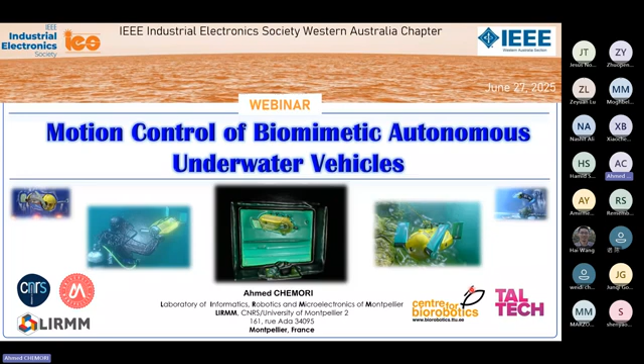This work has been done in a joint cooperation between our university, our research lab, and Taltech University, exactly at the Center for Biorobotics in Taltech University in Estonia.

First of all, before starting the heart of today's topic, let me introduce our research lab. It's situated in Montpellier. As you can see here, you have the map of France, and Montpellier is situated in the south of France. Beyond the fact that Montpellier is a very nice city, we have a lot of beaches.

Montpellier is known for several things. Let me introduce two or three things regarding Montpellier. First of all, we have very nice weather almost all year, and according to statistics, we have at least 300 sunny days per year. The second thing is that we have the Faculty of Medicine situated in Montpellier, which is the oldest faculty of medicine in Europe and maybe in the world. It was founded around 1220.

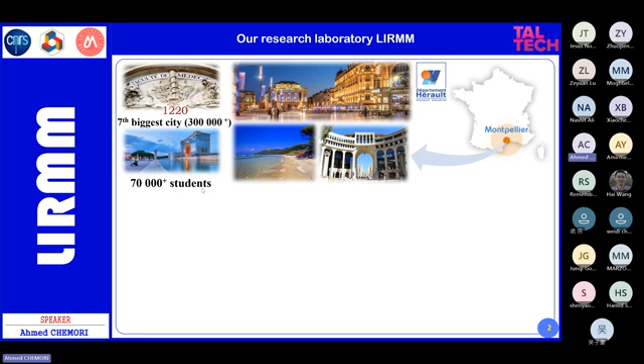Montpellier is the seventh city of France, with a population of more than 300,000 people, and a big part of this population are students. We have two big universities, and the number of students in the city is more than 70,000.

Now concerning our research lab, it's called LIRMM, coming from Laboratory of Informatics, Robotics, and Microelectronics of Montpellier, situated in the north of the city. As you can see on the left picture, we have the old building of LIRMM, and just near this one we constructed another building, shown on the right part of the slide — this is the new building of LIRMM, so we have two buildings.

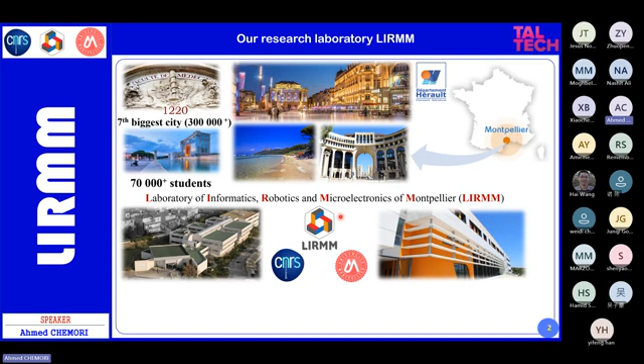Also, we belong to two institutions, as any research lab in the world. LIRMM belongs to the University of Montpellier, but also to another institution called CNRS, which is like a National Scientific Research Council, and it's the biggest research institution in France and in Europe.

In our lab we are more than 440 people, including permanent staff like CNRS researchers and faculty members from the University of Montpellier. We have more than 170 PhD students and 60 people working in administration.

As the name indicates, the lab is organized in three departments. The first one is computer science, which is the biggest department of the lab, almost half of the lab. We also have the department of robotics and the department of microelectronics. Concerning me, I'm working in the department of robotics.

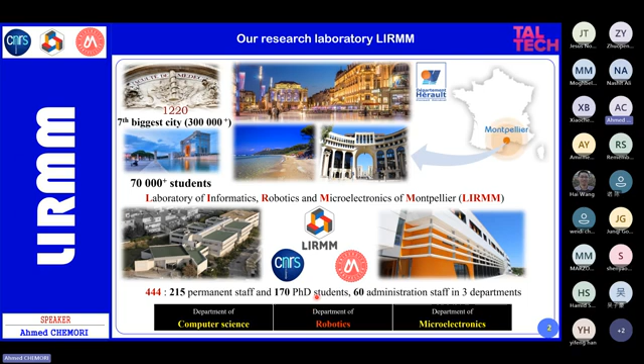Now, before starting the heart of today's topic, let me give you an overview of my research activities. What I'm doing is summarized here in the middle of this slide. I am interested in control of complex robotic systems, and what you see around here are the main applications I'm interested in.

So the first topic, I'm interested in control of parallel robots, or they are also called PKMs, coming from parallel kinematic manipulators. What is a parallel kinematic manipulator? It's something like that, or like that, or like that. So these kind of robots are constructed based on closed kinematic chains. Here in the down part we have the fixed base, and here we have the end effector or the moving platform of the robot. And then we have kinematic chains linking the fixed platform to the moving platform.

And here on the left, you can see another example of parallel robots. These are called Delta-like parallel robots or lightweight parallel robots, and mainly they are used for high-speed motions like food packaging, for instance. And the right picture here represents a parallel robot with 6 legs, and these kind of robots are mainly used for flight simulators or motion simulators in general.

One of the main drawbacks of parallel robots is the workspace. Since you have closed kinematic chains, the moving platform will have a small workspace. To avoid this problem, we can create parallel robots based on an actuation using cables, because the first two examples here show parallel robots using rigid links. We will replace the rigid links by cables, and we will control the cables to move the platform situated here in the middle, so we can have a big workspace. These are called cable-driven parallel robots.

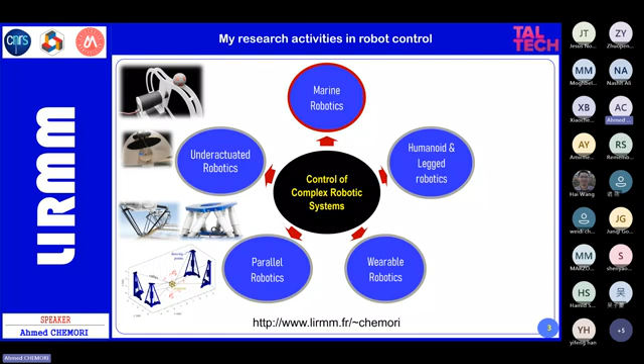Now we have some robotic systems that have less actuators than degrees of freedom, and the control problem becomes very challenging because these systems have internal dynamics which are unstable, and this creates non-minimum phase nonlinear systems, which are very challenging to control. Here you have two examples of under-actuated robotic systems, the inertia wheel inverted pendulum and the butterfly robot.

The third application, and this is the topic of today, concerns marine robots in general, so surface vehicles and underwater vehicles. I'm interested mainly in control of classical propeller-actuated underwater vehicles like this one, and also in the class of bio-inspired underwater vehicles. Especially, we did a lot of applications where we control the vehicle to do a cooperation between the underwater vehicle and the diver. And this is the topic of the lecture of today.

The fourth application: a few years ago I worked on control of humanoid robots, and the idea is to reproduce human walking on a humanoid robot while managing the interaction between the robot and the ground, the kind of ground, the rough terrains, and so on. And recently I have started working on this kind of robots, quadrupeds working in extreme conditions, like for instance the task of making this kind of robot walk in a muddy environment.

And the last topic concerns control of wearable robots or exoskeletons. In terms of control, we have a lot of challenges: we have to manage the interaction between the exoskeleton and the human. We have to manage the fact that the exoskeleton will be worn by a human that we don't know. We don't know, as you can see, the mass of the leg, the inertia of the leg, the friction. We have a lot of parameters and operating conditions that may change, and we have to take this into account in the control design. So whatever the control system we are interested in, for all those systems we have a lot of challenges.

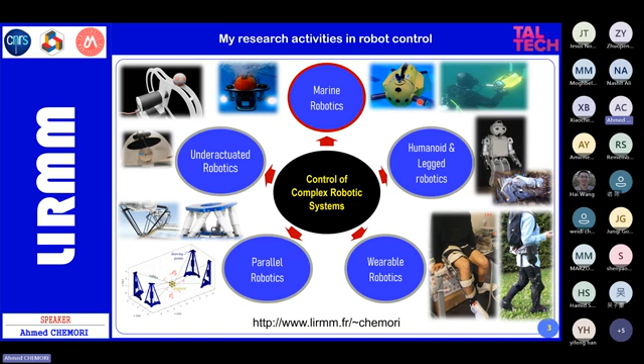This is why I am interested in control of this kind of systems. And also we try to find advanced controllers to control this kind of systems. So starting from now, I focus on the topic of control of underwater vehicles, and specifically the case of bio-inspired underwater vehicles. And here is the outline of the rest of my presentation.

So we will start with an introduction where I will introduce just very basic definitions of bio-inspired robotics, and then bio-inspired underwater robotics. Then I will introduce our underwater vehicle. Our vehicle is called UCAT. So I will explain from where UCAT has been designed, for which reason, which application, how UCAT is designed, the control system, the control inputs, the outputs, and the sensors and actuators, and for which kind of applications we developed UCAT. Then the last part concerns the proposed control solutions. Here I will focus on 5 of them.

The first control scheme is called priority-based control. Before presenting this control scheme, I will explain why this priority-based control. What is the motivation behind developing this kind of controller? Then we will move to the second control scheme that we developed. It's called acoustic-based control, and here we will use a feedback coming from the hydrophones on UCAT to follow an acoustic system, a pinger, in real time, and we will explain how the controller was designed and how it works. The third control scheme, in this case, we used another sensor, which is the camera, and we designed a vision-based control. Also, I will explain and show you a video of how this control scheme works.

The fourth control scheme concerns data fusion, because actually when we designed acoustic-based control, we noticed that we have some drawbacks and some limitations of this control scheme. Then when we designed the vision-based control, we noticed also some drawbacks of this control scheme, and then we got the idea to combine both of them. This is why we called the proposed control scheme data fusion, where we did a data fusion between acoustic signals and images from the camera together in one control scheme. And then also we designed a deep learning scheme that has been used for a specific reason in the controller that I will explain. And the last control scheme concerns fault tolerant control.

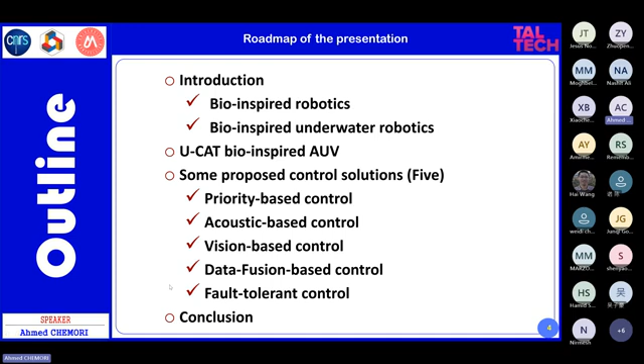I will explain. We supposed here that one of the actuators of the robot is not working, and instead of having 4 control inputs, we'd have 3 control inputs. And what would be the solution? So we propose the control scheme to manage this under actuation coming from one of the actuators not working after a failure. And then I will give a short conclusion of my lecture. So let's get started. First of all, let me introduce, as I told you, basic definitions.

What is bio-inspired robotics? Bio-inspired robotics is very easy to define. It's an interdisciplinary field between robotics and biology. And it includes mainly 2 broad areas. The first area is the area of biomimetics, and the second is biorobotics modeling and analysis. Let me explain further these two areas. So concerning biomimetics, what is the idea? The idea of biomimetics is to draw inspiration from biology. It means that we want to apply biological ideas and phenomena to resolve engineering problems in robotics. So this is the basic definition of the first area in bio-inspired robotics.

And this area covers many technical aspects of bio-inspiration. So we can have bio-inspired design of our robot. We can have bio-inspired motion control. We can have sensors which are bio-inspired, and we can have actuators also bio-inspired. So this is the first area. Now the second area, biorobotic modeling and analysis. The idea here is the application of robotic models and principles to address biological issues. Here it is the inverse. We will apply robotic models and principles to address biological issues.

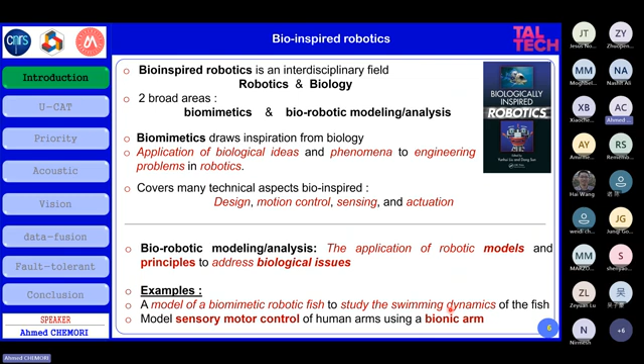Let me give you two examples to understand better. Imagine that you have a model of a biomimetic robotic fish, and we can use this robotic fish to study the swimming dynamics of real fish. So this is biorobotic modeling and analysis. Another example is to model the sensory motor control of the human arm, for instance, using a bionic arm. So the tool here will be the bionic arm, and the idea is to model the sensory motor control of the human arm.

So after presenting these two broad areas, let me now tell you further about biomimetics. So biomimetics can be morphology, but not only. As you can see here, we can design bio-inspired walking robots, inspired from animals. This is an example of a quadruped. We have a lot of examples, like here, a hopping robot. This is the real kangaroo, and this is the bio-inspired kangaroo.

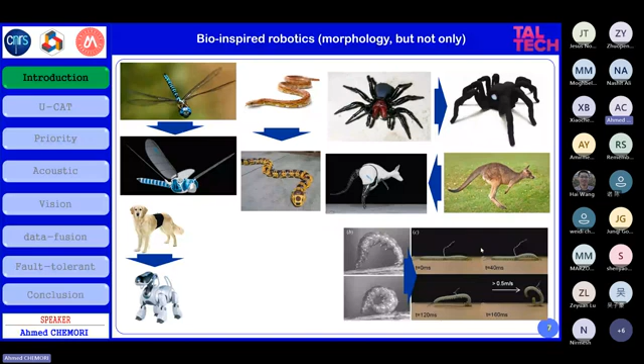As you can see, we have the general morphology, which is bio-inspired, but not only, because actually the actuation system here in the kangaroo is based on the Achilles tendon, which is bio-inspired also. We have some animals without limbs, limbless animals. We have flying robots, as you can see here. This is a dragonfly, which is bio-inspired. We have soft robotics nowadays, which is very much increasing in development, and we can see a lot of examples bio-inspired from insects and animals. And also we can have underwater bio-inspired vehicles.

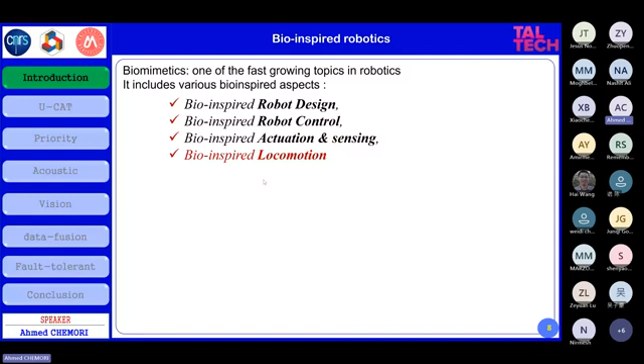Let me now give a definition of biomimetics. So as I told you, biomimetics is one of the fastest growing topics in robotics, and it includes various bio-inspired aspects. So we can design an underwater vehicle, we can design in general any robot, which is bio-inspired from a design point of view. We can also have bio-inspired robot control, so the controller itself can be bio-inspired. We can design robots bio-inspired in terms of actuation, in terms of sensing, or the last example here, the locomotion.

As you may know, for locomotion, we can have this very simple classification of bio-inspired locomotion. So in locomotion in general, we have terrestrial, we have aerial, and we have underwater. Let me introduce the three of them. First of all, for terrestrial locomotion, the human created the wheel. As you can see here, some examples of wheels. So we can use the wheel to move on the ground. However, if we are interested in bio-inspired locomotion, we will forget about the wheel and replace it by something else.

We can replace the wheel by legs, like animals here, and we have legged robots. As you can see here, we have an example of a quadruped, a robot with 4 legs inspired from animal quadrupeds. We can have also terrestrial locomotion based on limbless design. Here there are no limbs, and by undulation of the body of the snake here, or the snake robot here, you can have this locomotion.

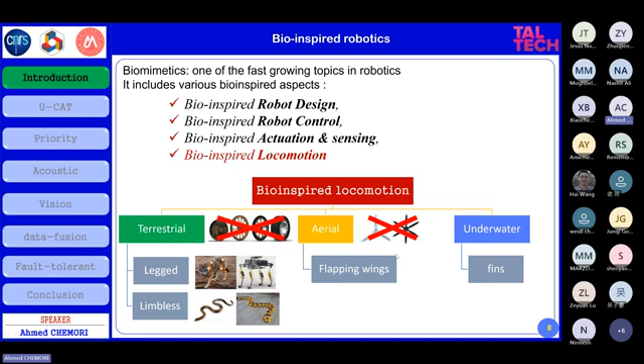Let me now introduce the aerial case. For aerial locomotion, the human also created propellers, as you can see here in two examples. And when we are interested in bio-inspired aerial locomotion, we will forget these classical propellers, and instead we will use flapping wings. Here you can see an example of a robot which is bio-inspired, equipped with two wings. And the idea is to control the motion of these two wings to control the motion of the body in the air to do a specific task.

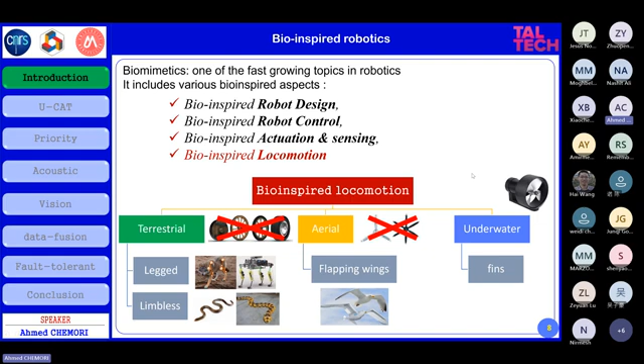The last example that I may show here is, for the case of today, underwater. For underwater, as I told you, humans created propellers. It's slightly different from the aerial propellers in the fact that you have here an envelope around the propeller, such that you will have a better efficiency of this propeller and a better generated thrust or force used to control the vehicle. And then depending on the underwater vehicle, we may have vehicles with one propeller, two propellers, six propellers, eight propellers, depending on the design of the vehicle itself.

So if we are interested in bio-inspired underwater locomotion, in this case, we will not use this kind of propellers, and instead we will focus on using something else. If we see the sea animals, they are using fins. So for bio-inspired underwater locomotion, we'll use fins, and we will have two kinds of fins that I will detail later in the lecture. And here you have some examples of bio-inspired underwater robots.

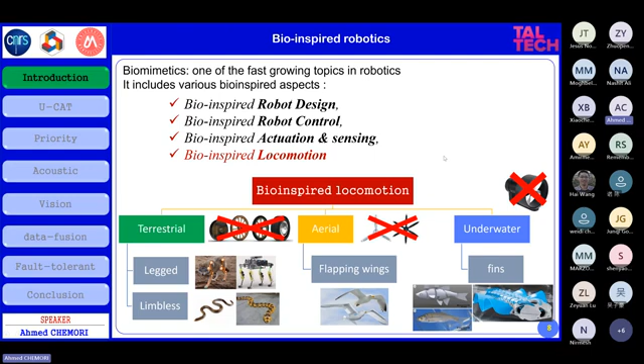And this umbilical is used for another reason also. The underwater vehicle is equipped with several sensors, and to get the measurement from the sensors on board the vehicle, we use this cable also, or this umbilical. So this is the first class, and the challenges in terms of control of these underwater vehicles: actually they are controlled in open loop, because it's the human controlling the underwater vehicle, and he can see on the screen the feedback from the camera and the measurement from the sensors.

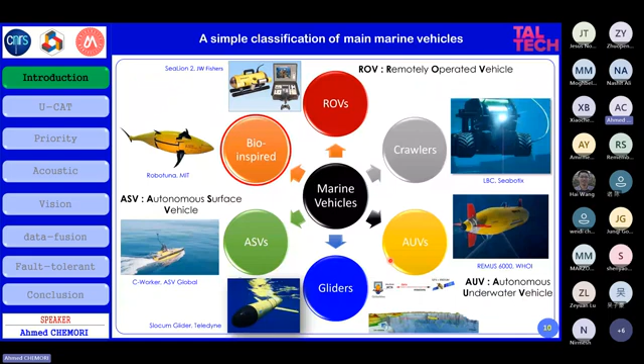However, if we look to nature, let me introduce you 4 examples. The first one is the sea turtle. The second one is the sea snakes. The third example is the manta ray. And the last one, flying fish. So if you look to the sea animals, none of the sea animals are using propellers.

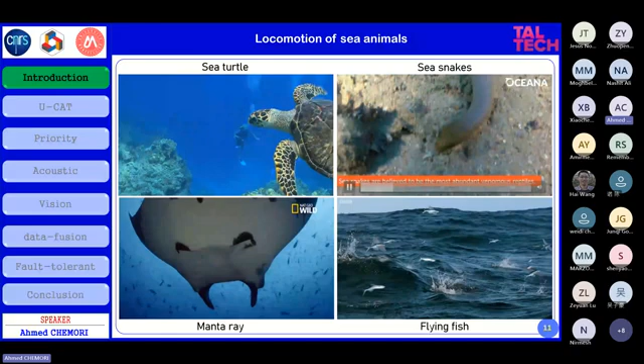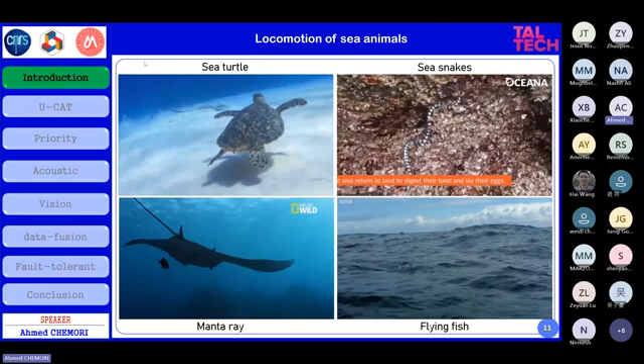Snake robots, by undulation of the body, can have a very smooth motion. They can go inside confined environments. Here also the third example concerning the manta ray. Here the actuation is slightly different from the turtle because it's not using oscillating fins, but it's using undulating fins. And the last example, the flying fish, uses the fins both for underwater and also for flying. And now the idea is, why don't we design robots inspired from these sea animals?

So let me introduce now a basic definition of bio-inspired underwater vehicles. A bio-inspired underwater robot is a robot designed based on biological ideas. As I told you previously, it can be based on the design itself, the actuation system, the sensing system, and so on. And it is designed to address technological problems in robotics. So what are the main features of a bio-inspired underwater vehicle?

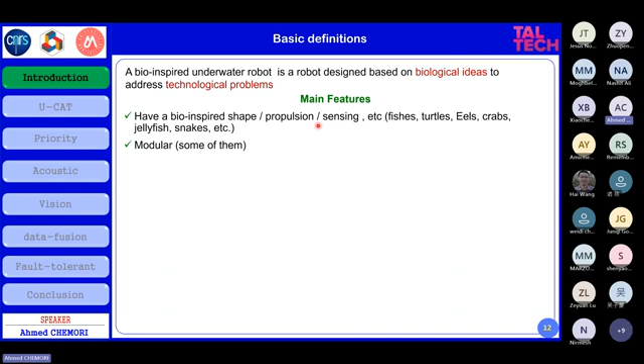First of all, bio-inspired underwater vehicles may have a bio-inspired shape, as you have seen in some examples. The propulsion system or the actuation system can also be bio-inspired, as well as the sensors, and we can find a lot of examples inspired from sea animals, including fish, turtles, eels, jellyfish, snakes, crabs, and so on.

And some of them, like the snake robots, are designed based on modular conception, because it's easier in this case: you just construct a module and you duplicate this module, you connect all the modules, and then you control them to generate the motion of the underwater vehicle.

Some potential applications where these bio-inspired underwater vehicles are used: for data collection, if we want to measure the quality of water, we can use this kind of vehicle. Underwater pollution detection, for instance in a pipeline, where you want to detect pollution. They may be used also for video footage, inspection, and monitoring, and also to study new sensing and actuation strategies.

It means that you design a new actuation system and you want to study the effect of this actuation system, the performance, compare it with other propulsion or actuation systems, so you can design or use these bio-inspired vehicles.

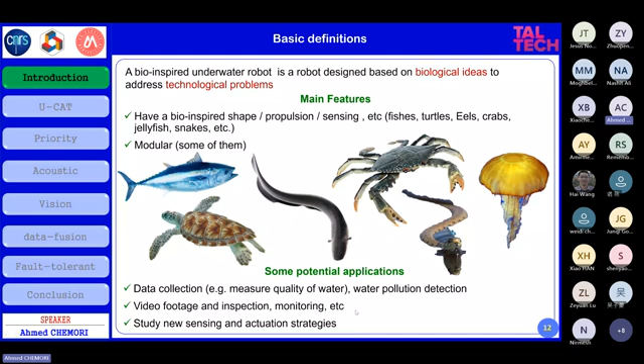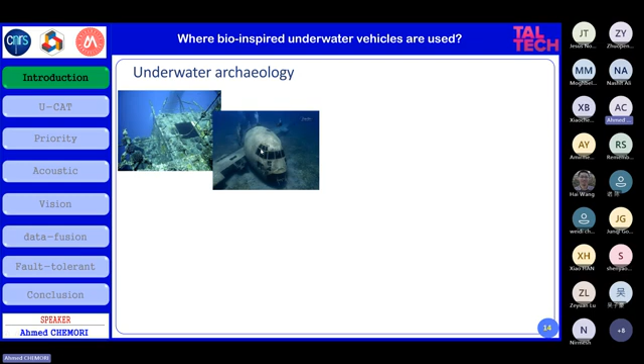Underwater archaeology means you have to go inside a shipwreck or airplane wreck, as you can see, inside water. It's very challenging to do this task because of a lot of challenges that I will explain later on, because actually in our vehicle U-CAT, we are interested in this specific application.

A second application can be cooperation between the bio-inspired underwater vehicle and a diver. It can be cooperation or just simple following, so the diver is moving and the underwater vehicle should follow the diver in real time. This is the second application.

The third application is for fish monitoring and aquaculture applications. For instance, you have a population of fish, and you can have a lot of problems. One simple question we may ask is how we can know the number of fish inside a specific area, how we can count them. Counting the number of fish is a problem, and as a solution, a bio-inspired underwater vehicle can be used to study the motion of the fish with less disturbance. Maybe we can design a fish-like underwater vehicle for this.

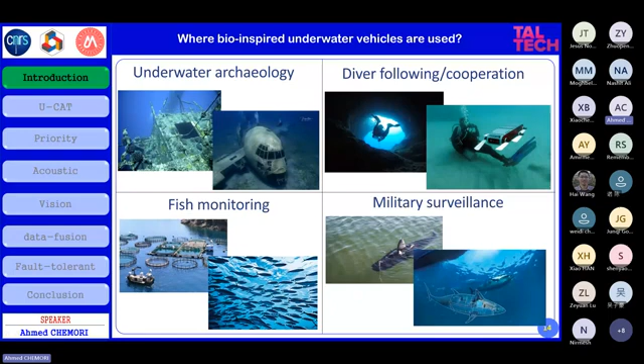The last application is for military tasks, like military underwater surveillance, for instance. We can also use bio-inspired underwater vehicles here. After this introduction of the different applications, let me show you some examples of existing bio-inspired underwater vehicles.

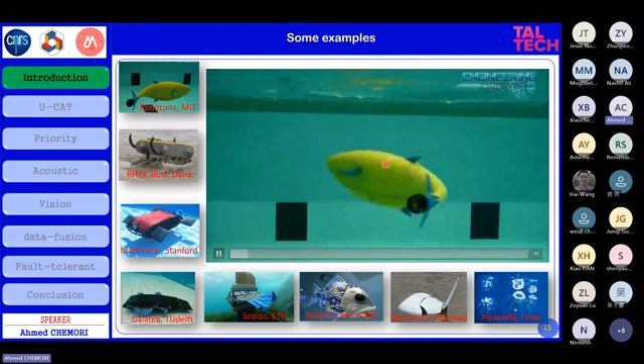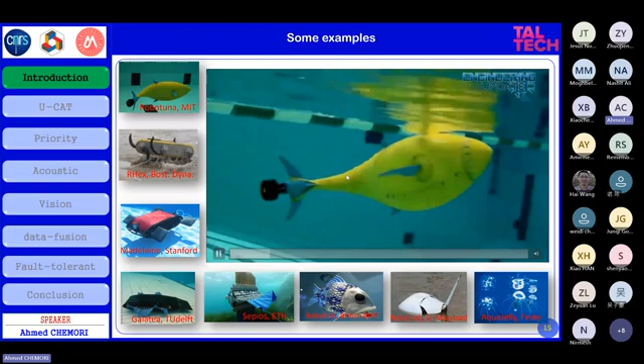As you can see, the first one is called Robotuna. Robotuna has the morphology of a fish, with different fins and so on. You have to notice that the tail is flexible, and the tail is controlled to move to the right and to the left. Also, we can see the propeller at the end of the tail of this fish.

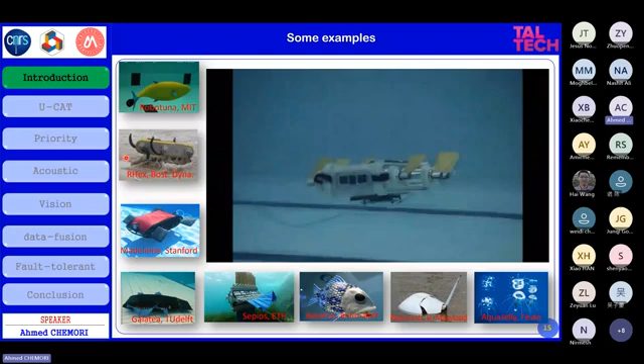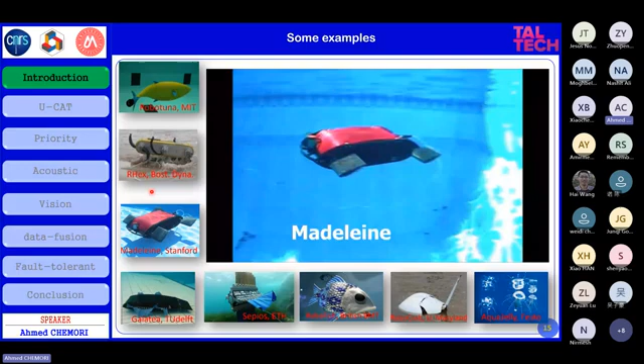The second example, from Boston Dynamics, is called RHex, an underwater vehicle with 6 propellers, though here it's not classical propellers but 6 fins. The next one, Madeleine, is from Stanford University, similar to the previous one, but here it uses 4 rigid fins, and the fins are controlled to control the motion of the underwater vehicle.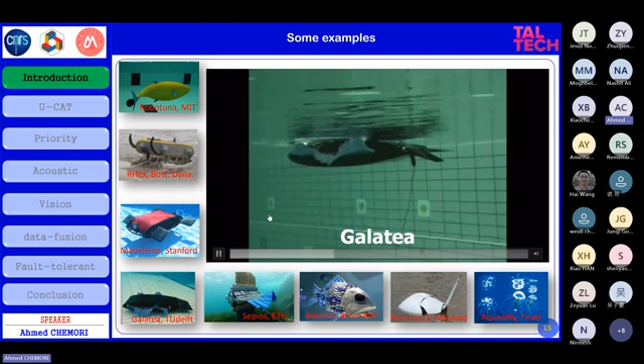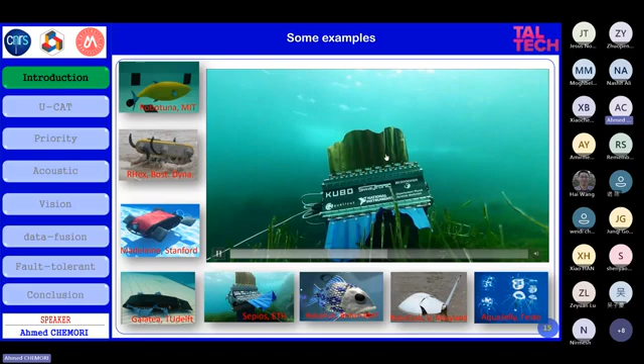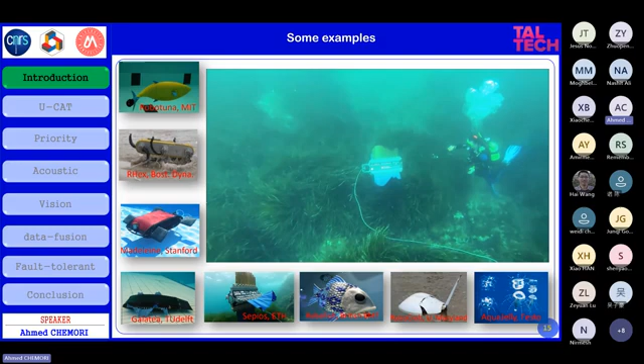The next one is called Galatea, from Technical University of Delft in the Netherlands. This is what I explained before: undulation fins. The fins undulate, and if you want to control the motion of the vehicle, to go faster or slower, you change the parameters of this undulation. Next is Sepios, also from ETH, same concept, using 4 undulating fins. To go faster or slower, you can change the oscillation parameters of these fins, like frequency or amplitude. These two parameters can be used to control the motion of the vehicle.

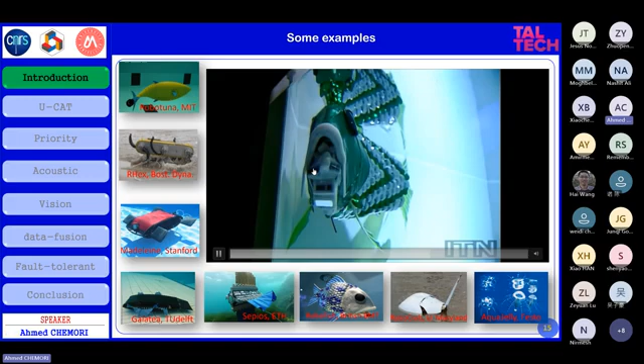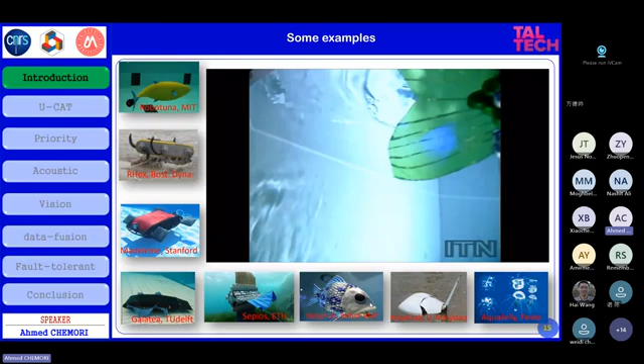The next one, Robofish, as you can see, is like Robotuna. It has the morphology of the fish. It has a tail, which is flexible and can move. It's controlled to move to the right and left to push the vehicle in the desired direction. Depending on the application, you may put a camera here, for instance, to take pictures or videos.

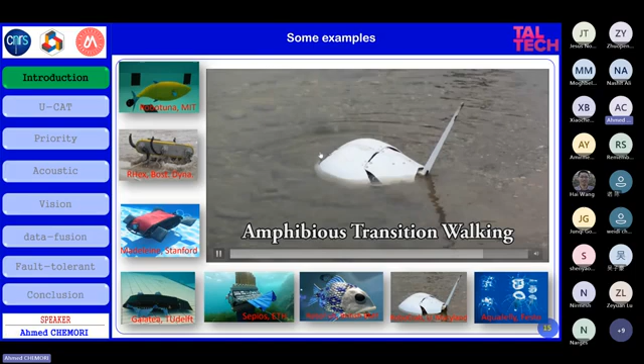The next one is RoboCrab, an amphibious underwater vehicle, because as you can see, it is able to walk on the ground and also able to swim or dive inside water. This is why it is amphibious. In terms of control, in both mediums, it's not the same technique that we may use.

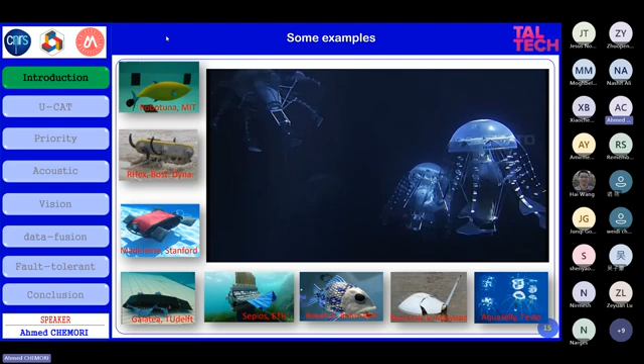Here's the last example, AquaJelly from Festo. This is a bio-inspired underwater jellyfish, and as you can see, its actuation system is very simple: an actuator that moves up and down, moving the different fins of the vehicle to move inside water. Now let me move to our underwater vehicle.

Our underwater vehicle, as I told you, is called U-CAT, designed a few years ago at the Center for Biorobotics in Estonia at Tallinn University of Technology within a European research project called ARROWS. The idea behind designing UCAT was mainly for archaeological applications: to go inside a shipwreck and take pictures, videos, and do inspection of the shipwreck. This is the main application of UCAT.

So what does this mean? What are the consequences if you are interested in shipwreck inspection, and what constraints must be taken into account in the design and control of this underwater vehicle and its actuation system, because of this specific application? I will say a few more details about this.

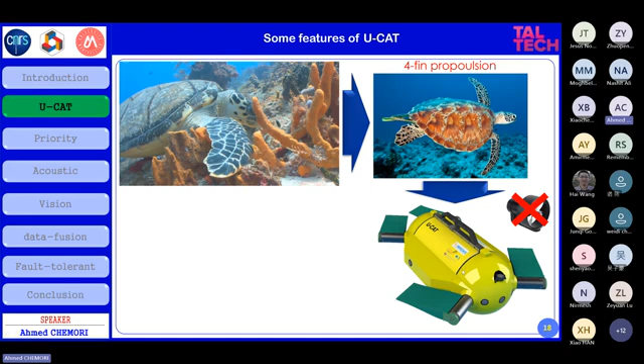Some technical features of this underwater vehicle: first, why we designed it and why we were interested in controlling it. Mainly the targeted application was underwater archaeology, specifically inspection. So the robot is not equipped to do underwater manipulation, just underwater inspection, mainly using a camera or video to identify objects of interest.

In the design itself, regarding the underwater archaeology application, we had a lot of constraints, and one is the size of the underwater vehicle. It should be small, because we have to go inside the shipwreck, a confined environment, so we have to pay attention to this. If you design a big underwater vehicle, it won't be possible to go inside the confined environment. This is the first reason.

The second one: it should be highly maneuverable, to change direction and orientation very quickly.

This is needed also for this kind of application. Then another constraint regarding the design of the vehicle concerns the actuation system. As you can see here, we don't want to use classical propellers. Why are classical propellers not a good solution for this kind of application? Because they restrict the visibility near the bottom.

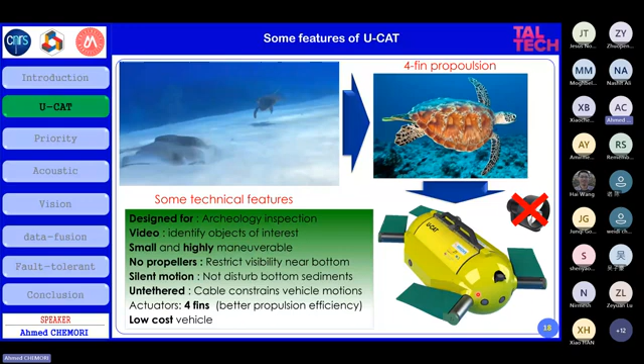In terms of actuation, as I told you, we have 4 fins, the green parts here, actuated by motors, and I will give you more details about this in the next slides. Now let me introduce the actuation and sensing of this underwater vehicle.

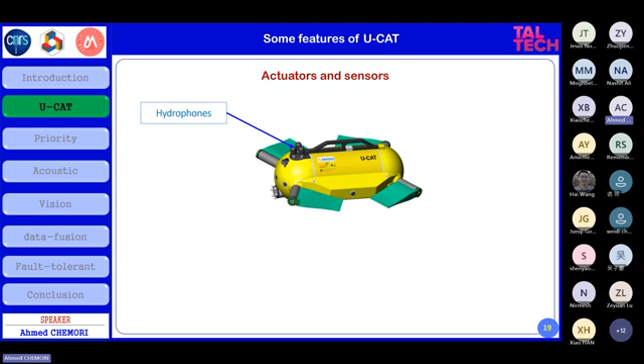In terms of sensing, the robot is equipped with 3 hydrophones. Why hydrophones? They are used for underwater acoustic communication. For instance, I will show you some scenarios where we did acoustic-based control, using these 3 hydrophones to control the underwater vehicle. I will give you more details in the next slides.

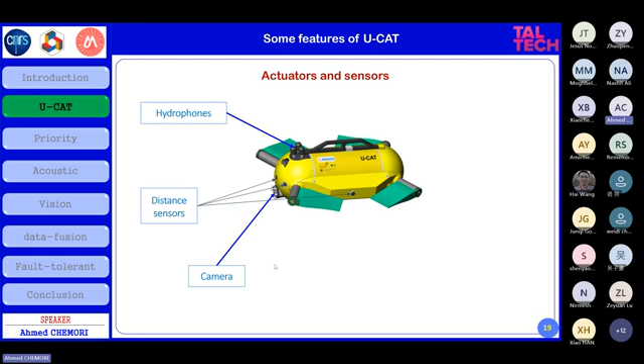Then the vehicle is equipped with some distance sensors. It has a camera to take videos and pictures of objects of interest, and also different kinds of sensors, like the IMU, the inertial measurement unit, used to measure the orientation of the vehicle: roll, pitch, and yaw.

It's also equipped with other sensors, for the depth, which is a state we need to control and measure in real time. We use a pressure sensor to measure in real time the position of the vehicle underwater, and other sensors like temperature or humidity sensors.

In terms of actuation, we have 4 DC brushless motors used to actuate the 4 fins of the underwater vehicle. We also have inside the vehicle a buoyancy control system, which we can change to move up to the surface or down, based on this buoyancy control. In the actual controllers we proposed, we didn't use it yet, but the initial design of UCAT includes this buoyancy control system.

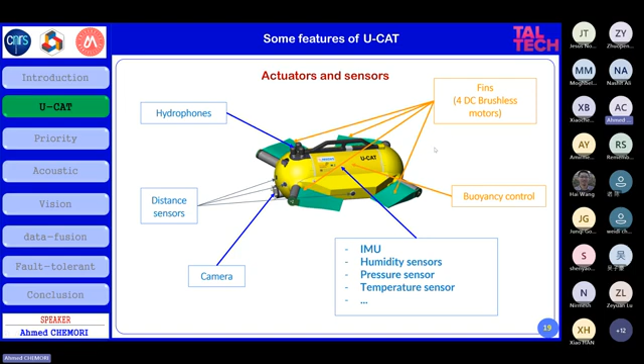Now, what we have proposed as control solutions. Let me show you first some control issues. The first control issue, as I explained before, is the actuation of the system itself. We want to control some organs or control system in the vehicle, so we had the choice between using classical propellers or using fins like that.

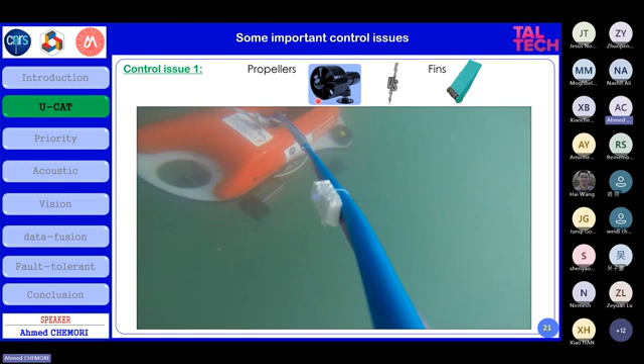Let me show you our design, why we chose fins like that instead of classical propellers. The video we will show you compares classical propellers to fins. Here we have another underwater vehicle, an ROV, which uses classical propellers. We did this diving task near the harbor, and see here the sediment disturbance.

So if you use a camera here, we cannot see anything, and this is very bad for underwater inspection based on a camera. This is the reason why we don't use classical propellers like that. Instead, we use fins.

Here in this sequence, as you can see, UCAT is diving very close to the bottom, to the seafloor, and there is no sediment disturbance because of the motion of the fins, which does not disturb the sediments. This is the first thing to keep in mind.

So we are using fins to avoid disturbing sediments, but not only that—we have other reasons too, because of energy consumption. We haven't yet proven that this kind of underwater actuator is better in terms of energy than the propeller, but it's possible to prove this.

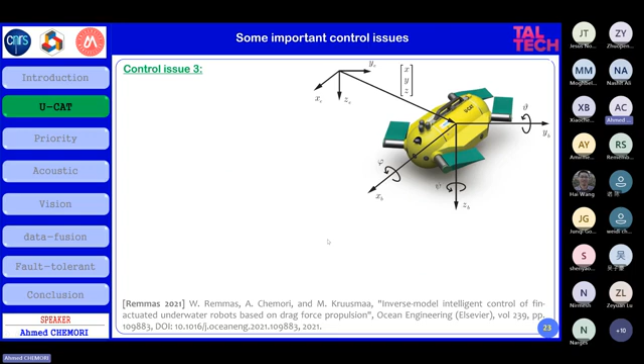The third control problem concerns the fins themselves, because for a classical propeller we can find in the literature a very nice, precise model of these underwater propellers. However, for our case, using fins like that, the model may be very difficult. The model of the vehicle itself is easy; we can find it in a textbook of marine robotics, the model of an underwater body like that of the vehicle. However, the actuation itself using fins, it's very difficult.

Very difficult, why? Because actually the fin itself is not rigid, it's flexible. And if you want to take in this flexibility to have a nice model which is precise, you need to use, for instance, the finite element method. But the consequence is you have a very precise model, but its complexity will be very huge, and it will not be possible to integrate this model in real time for the control of the vehicle.

However, we can use a very simple model also by neglecting a lot of things, neglecting flexibility, for instance. You have a very simple model, but it will not be very performant. So the idea is to take a compromise between high complexity, where you have a very precise model, and very low complexity, where the model is not very precise. So we have to take this compromise. And the dynamic model can be written like that.

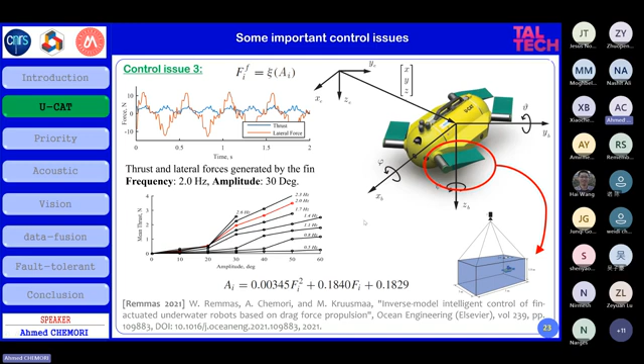So it's a compromise. We make a lot of assumptions, and we arrive at this model that can be integrated in real time. So we used first this model, and then we worked on a more complex model that I will not present here. The fourth control issue here is the control mode, because the vehicle can be operated in

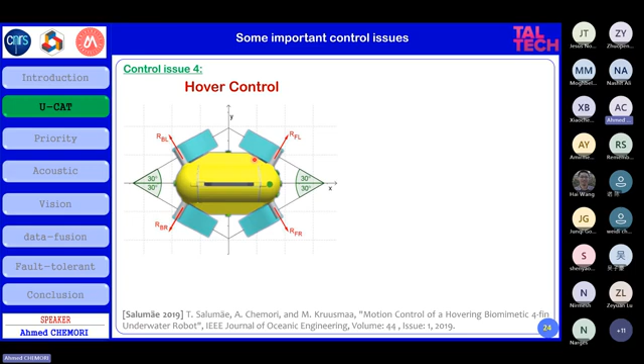two control modes. The first control mode is called the hover mode. In the hover mode, as you can see, the orientation of the fins is like that. This is the front of the vehicle, the rear of the vehicle, and we orient them like that. We have a second control mode, which is called the cruise mode, and the orientation is different. This is the front of the vehicle, the rear of the vehicle, and the fins are oriented like that. What is the difference between the two control modes?

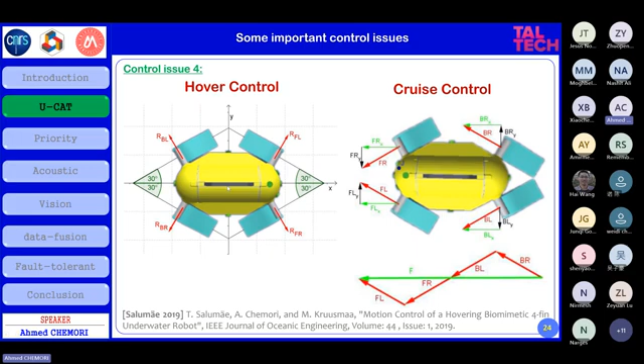The cruise mode is used mainly to move for long distances, like for surge, because the generated force, or thrust, by all the fins, the rear fins and the front fins, is bigger. However, hover mode control is well suited if you want to stay around a specific position, like dam inspection, for instance. You want to stay in front of the dam to take a picture or a video, and you want to stay stable around this position. In this case, the cruise mode is not possible, because it is designed for a continuous motion along the surge. However, with hover mode, we can stay around a specific position with precision.

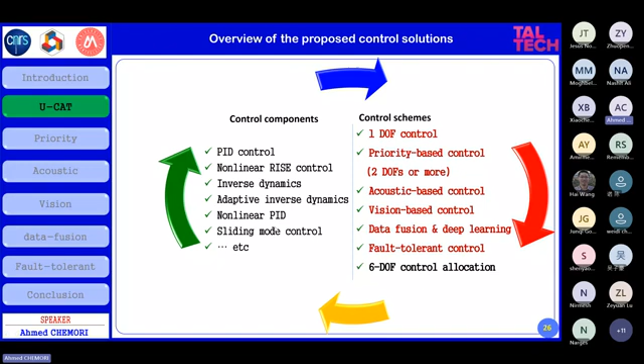Now, in terms of control solutions, we designed several control solutions. We started with the control of 1 degree of freedom. We designed different controllers. As I told you, if you want to control just 1 degree of freedom, it's not very difficult. Then we tried to tackle the problem of controlling more degrees of freedom. So we started with priority-based control that enables controlling 2 degrees of freedom or more. And then we tried to use the sensors on board the vehicle as feedback. So we used acoustic signals, vision-based signals, data fusion between them, and fault-tolerant control at the end.

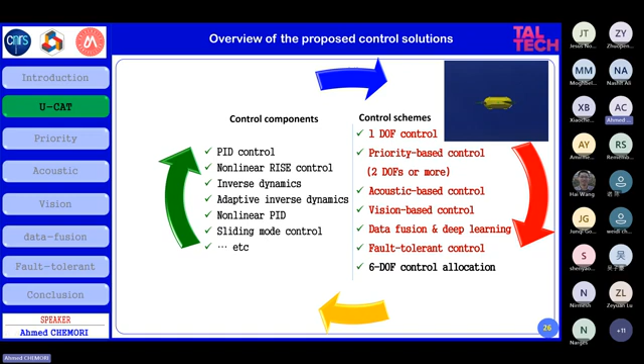We did another work, actually, which is in progress, where we are controlling all 6 degrees of freedom. We did some simulations first to validate the control schemes in a simulator of a robot. Then we did experiments in a controlled environment in the pool, and then we did different experiments in open water. And here, just to show that the robot is human friendly, we organized a day for kids, and they were swimming near the robot without any safety problems.

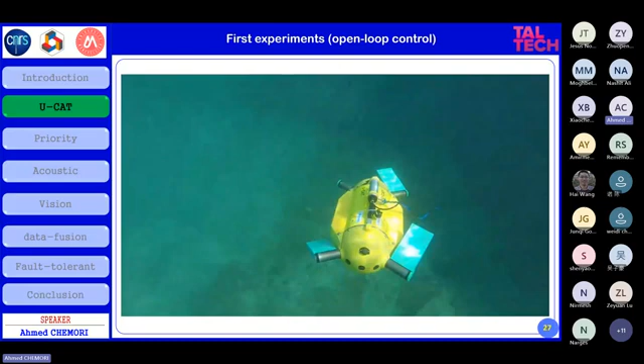Now, let me show you some of the experimental results that we obtained. First of all, this is the control of the vehicle using a joystick. This is an open loop control without any controller inside. It's just the human manipulating the joystick to control the motion of the vehicle. And here you will see an illustration of the different degrees of freedom, the motion, the different orientations, how the vehicle is moving, and especially the consequence of this kind of open loop control.

Look here, this camera is on board the vehicle, and when the vehicle is moving, you can see that the roll is not very stable. The roll is not very stable for a reason. Here is an illustration of the different degrees of freedom; here we are moving along the y-axis.

We change quickly; the orientation is highly maneuverable. Now we are rotating around the z-axis, for instance, by moving the fins of the vehicle, and we have different illustrations. Now, the problem of the roll, why the roll is moving like that, as you can see, is because we have the fins, the right side and the left side fins.

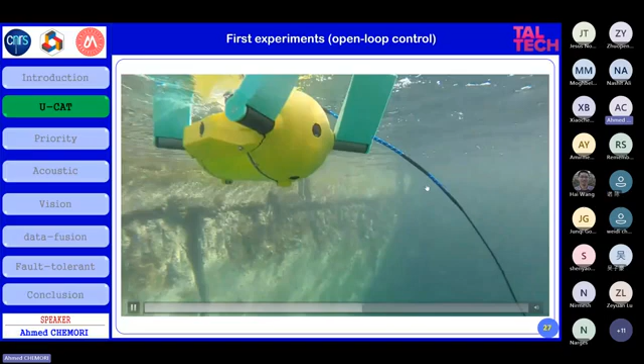Here you can see the human using the joystick, controlling the vehicle, and you can see the obtained motion. And as I told you, the problem of the roll instability is coming from no synchronization between the right and left fins. So without any synchronization, we obtain a roll of the body of the vehicle which is not stable in the roll degree of freedom.

Here you can see that the fins of the vehicle are flexible. As you can see, they are not rigid, and this is the obtained motion. Nice. So after this open loop control, let me show you a closed loop control. We started with the control of 1 degree of freedom. Here is the control of the depth, and we did the experiment in a swimming pool.

And as you can see, the perfect motion of the vehicle vertically up and down, by controlling the fins of the vehicle. And the roll of the vehicle is very stable. The reason behind this is that we did a synchronization between the right and the left fins of the vehicle, so we obtained this stable vertical motion.

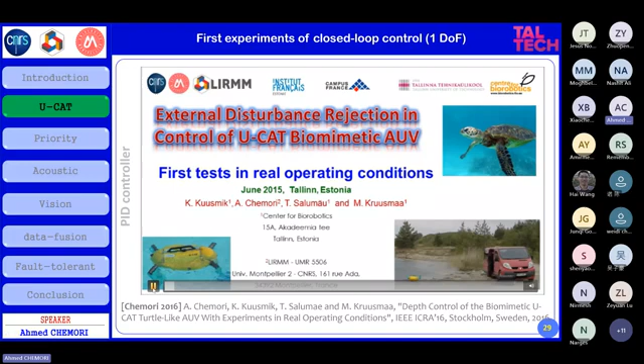So after controlling the vehicle in 1 degree of freedom, we started doing experiments in open water. We did some experiments in Estonia here, and you will see that the operating conditions are much more challenging than the previous case in the swimming pool. As you have seen, the visibility was very good. However, here the visibility is not so good. We have different particles inside the water, and so on.

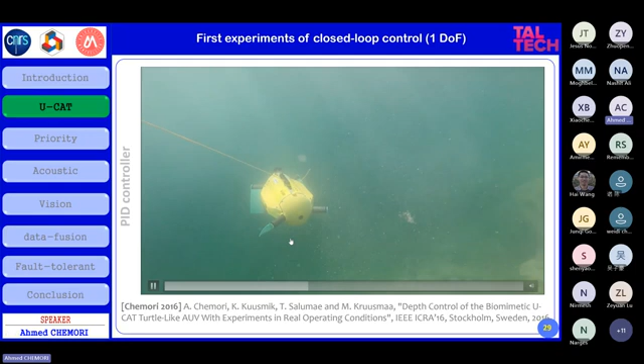So we go from the surface to a certain desired depth. If you want to go down, you orient the fins in this direction and control the oscillation. If you want to go up, you have to orient the fins down like that. When you arrive at the desired depth, which was around 2 meters, the orientation will be horizontal. Horizontal orientation of the fins means that the tracking error on the depth is near zero.

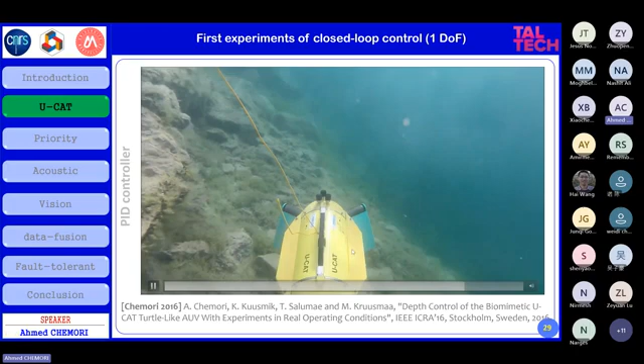Here we disturb the vehicle; we apply an external disturbance. The yellow cable that you see here is not an umbilical, pay attention. It's just a wire without any electronics inside, no control signal, nothing. It's first to disturb the vehicle, and second to avoid losing the vehicle inside the lake where we did the experiments. So we apply this disturbance, it goes back around the desired value, and this shows that the controller is able to reject this external disturbance.

So if it is 0, it means that for the yaw and the depth, the weighting value is near 1, and the weighting function for x, for the surge, is almost 0. It means that we give more priority to the depth and the yaw. If you want to give more priority to the surge x, we have to choose a parameter near 1. And then we can switch between 0 and 1; we can take continuous values between these two values.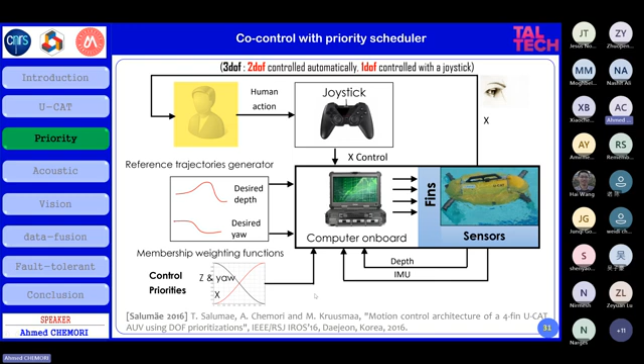The obtained results in trajectory tracking: this is the trajectory that we designed here, as you can see. So we did 3 control modes. The first one is the manual control. So we ask the human to follow this predefined trajectory approximately, and the human is manipulating everything. So here, the robot is manually controlled by the human.

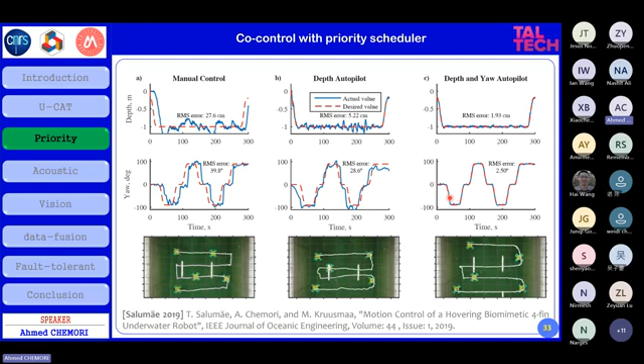Then we try to reduce the intervention of the human. In this case, we add a depth autopilot. It means that the depth is controlled automatically, and the human is controlling just the yaw. And the last one is the depth and yaw autopilot, so both are automatically controlled. And as you can see, the tracking is much better in the third, autonomous case.

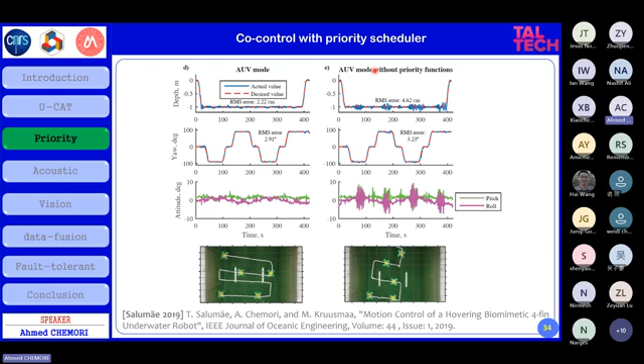And this here shows what happens if we add or don't add these priority functions, and without the priority function, the tracking error is worse than the case where we take them into account.

Then acoustic-based control: the idea is to use the 3 hydrophones of the underwater vehicle to follow a pinger. We did different scenarios, a static pinger, then a moving pinger. We give the acoustic pinger to the diver, who will move, and based on this measurement, we try to follow the diver in real time. Let me show you the obtained results for this scenario.

So here we ask UCAT to follow the diver. The diver is moving here. We use the measurement from this pinger. It's the yellow part here held by the diver. And the diver is moving. And as you can see, UCAT is controlling the depth, the yaw and the surge to follow the diver in real time. So the diver is moving and UCAT is following the diver in real time, as you can see here, thanks to this feedback from this acoustic signal.

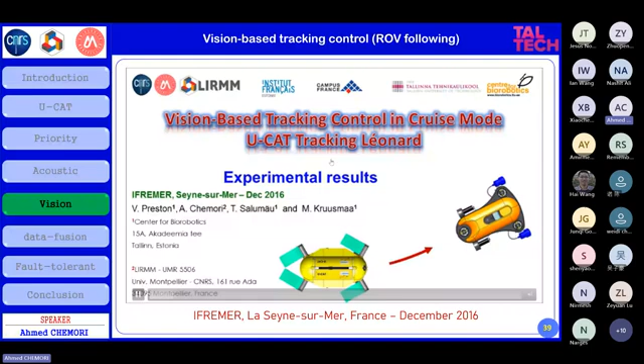However, what we noticed here is the problem of precision of tracking, because we cannot have a good precision of tracking using this acoustic signal. Then we tried another measurement, which is the camera. And based on the camera, we designed a vision-based tracking controller.

Here, the scenario is an underwater vehicle moving, and UCAT is using just the camera to follow this moving underwater vehicle. And the big challenge here is we need to keep the first vehicle, the target, inside the field of view of the camera. If the first vehicle is turning to the right or the left, we may lose it very easily outside of the field of view of the camera, and in this case we cannot do anything.

This is why we need to design a very reactive controller, such that when the target starts moving to the right or the left, we turn to the right or left quickly to avoid losing the target in real time, and we succeeded in this tracking. So the camera has a good performance in terms of precision. However, if the target is outside of the field of view, or far away from the vehicle, or if the visibility is not good, the camera is not suitable.

Then we designed the data fusion controller, and here we tested using both. It means that if we can see the target in the field of view of the camera, we'll use both, the acoustic signal coming from the pinger and the camera. If the target is outside the field of view or far away, or the visibility is not good, we'll rely only on the pinger, the acoustic signal. And then you can switch between them depending on the situation in real time.

Here we tried the following. We try to follow the diver, as you can see, and once the diver is outside the field of view of the camera, we stop the experiments because we cannot continue. We don't have any further information. So this is the visual tracking.

And the last scenario here is fault-tolerant control. So what we did in this work is we suppose that one of the fins is not working. We stop one of the motors and we keep just three working, and we try to follow an elliptical trajectory like that here. We compare the PID controller and the sliding mode controller.

Here, just one information regarding the tags that you can see in the bottom of the pool here. They are used to measure or to localize X and Y. So the surge and the sway, the position in X and Y of the robot. This is why we use these tags here and the camera of the vehicle, so we can know the position XY of the vehicle. The depth and the three angles are measured by using the pressure sensor and also the IMU. And here we do the tracking.

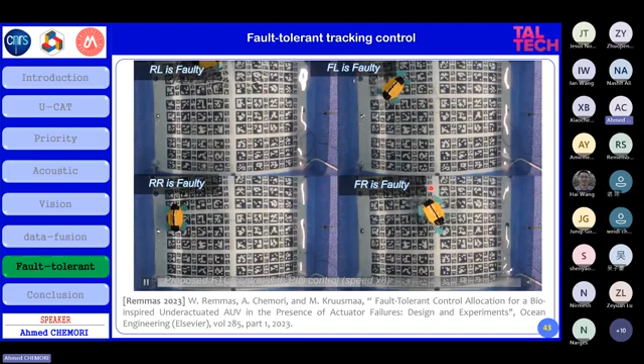Now for the control allocation with the PID, here it depends on which fin is faulty. Here, like the rear left, the rear right, the front left, front right, and you can see we repeat the same scenario of tracking. And look, for instance, if you take this scenario, it's not working at all because we ask the robot to follow this elliptical trajectory, but it stays in the middle. So it's not possible to control the vehicle. It's very challenging. And this is using the PID controller.

And then we repeat also the four scenarios now using the sliding mode control. And we will show that here we're using sliding mode control. So the obtained performance is much better than the previous case with the PID. As you can see, even the fourth case, the tracking is not perfect, but it's still working better than PID.

That's all. Now let me just conclude the presentation of today. So I tried to present today the control problem concerning biomimetic underwater vehicles. I introduced the general context for the application targeted in our study, which is underwater archaeology for inspection applications. I introduced different challenges in terms of design of the vehicle and also in terms of control.

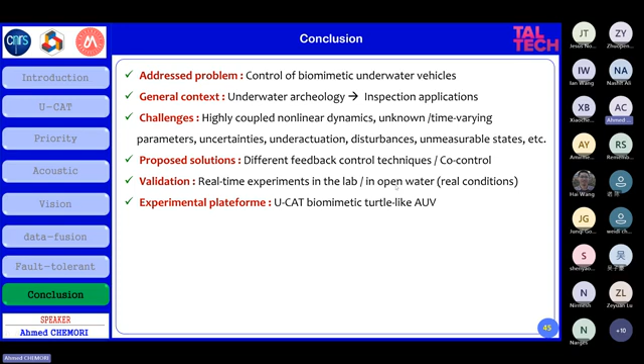And I showed you some proposed control solutions depending on the control itself and depending on the feedback that we are using, if it is the camera or the pinger or something else. We validate in simulations, but much more in real-time experiments in a controlled environment in the lab and also in open water. And we validate all the controllers on the U-CAT underwater vehicle.

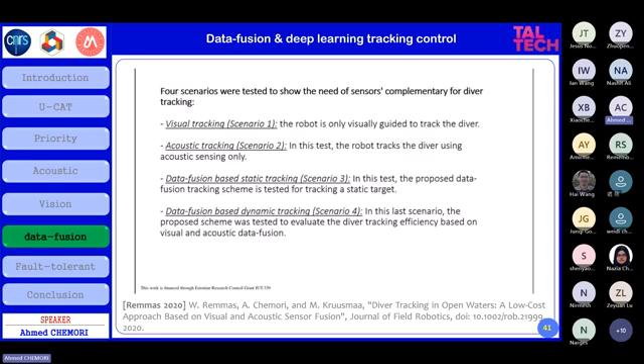Very nice question. Yes, I didn't introduce details here. As I told you, the idea is to track the diver. First, we experiment with the pinger alone, and we detect the pinger - it's very easy to detect. However, the diver is difficult to detect, so we didn't develop a new deep learning algorithm. We use an existing deep learning algorithm to detect the diver, and it's a neural network.

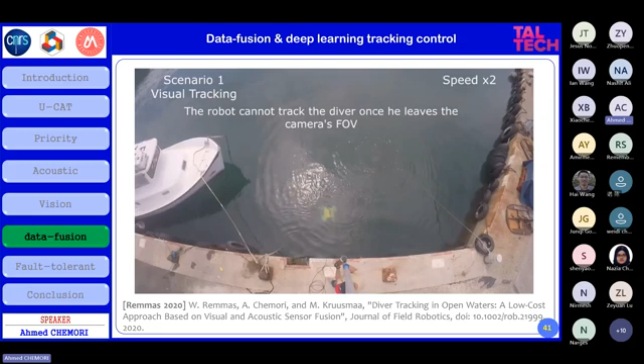What we did, I remember when we did the experiments for this control scheme, the PhD student who implemented this downloaded a lot of videos of divers on the net. He did the training of the network using these videos, leaving the network working all night, maybe 10 hours of training. In the morning, we took this trained neural network and tested it in real conditions. It was really fantastic because it was working.

If you want to know more about what deep learning technique we use exactly, what parameters and so on, I invite you to have a look at this paper, published in Journal of Field Robotics. You have the details, the title, everything here. The paper can be downloaded on ResearchGate. If you have trouble downloading it, just send me an email and I will send you the paper in question. Please have a look at the paper, and there you can find all the details about the deep learning part we used in our case.

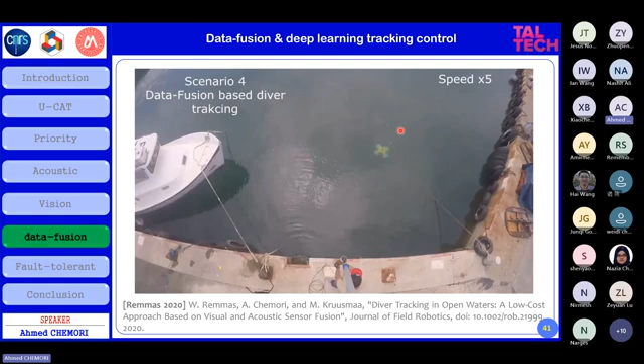What I show you here is just a video that summarizes the final result, because the diver, as you can see, is moving and the U-CAT is following the diver. In this scenario, the bad thing is that the visibility was not so good. If the diver is at most 1 or 2 meters away, it's okay - we can see the diver in the field of view of the camera. But if the diver is at 3 meters, we cannot see the diver. This is the big problem.

The deep learning algorithm is active all the time, in real time, and it screens the pictures from the camera, the images, and trains. Once the algorithm sees a diver in the field of view, it says, oh, it's a diver, and automatically the controller will switch to the configuration where we use both the pinger acoustic signal and the images of the diver, trying to follow the diver. If the diver turns right, left, or goes away, we forget the diver and switch to relying 100% on the signal coming from the acoustic pinger.

That's it, is it clear? Yep, yeah, it's more clear now. Thank you, I will go through the paper. Thanks, exactly. Thank you very much, dear Ahmed.